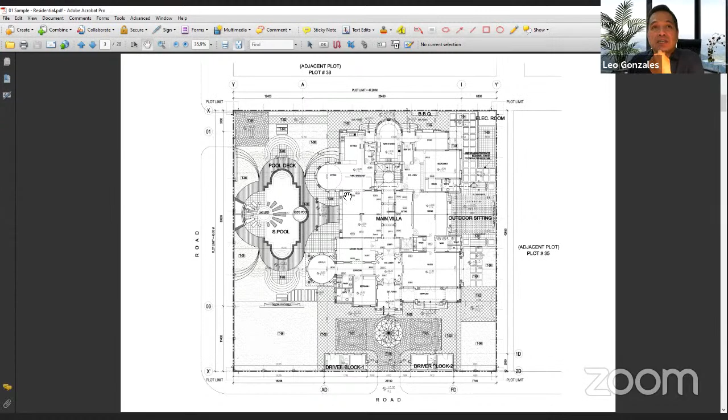So as you can see, the architects attempted to put in a bunch of lines and created these shapes and called it a swimming pool, and then they put a jacuzzi in there. This is the floor plan isolated, so you could have an idea on the size of the open space surrounding it.

Translating that into the definition of spaces, we came up with this very basic conceptual diagram. He wanted a grander entrance, so we've basically created a motor court with some nice paving and some patterns. Then he wanted a guest access, so we provided this linkage to the back and created a patio on the side here. They've originally provided an outdoor sitting, but we've looked at enhancing it further.

He asked for a swimming pool, which we've located on this side because this is the widest spot that we have on plan, and also it would help enhance the views coming from these rooms.

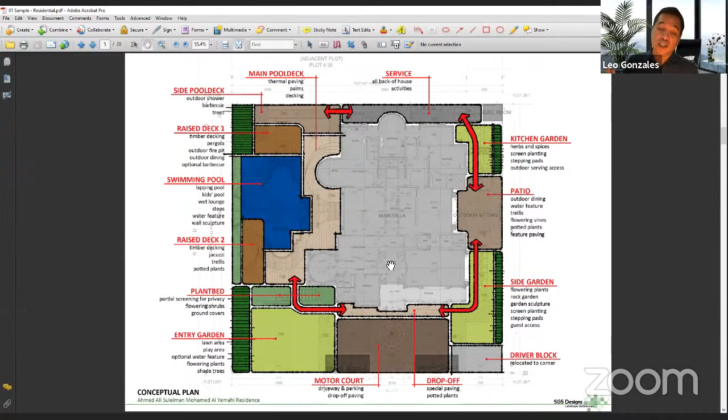This is a quick study on one style, wherein we've defined the paving spaces. We went with a very formal, regular style, using a lot of grids and dimension stone, so it looks a little traditional in terms of the textures we were creating and in terms of the shapes.

It's asymmetrical balance. Like we've got the square here, but it's not really symmetrical. But when you're viewing it from the living room, you see a symmetrical view of the water wall and these 4 trees. The same goes for this angle. The axis, when you're viewing the pool going that way, there is still balance even if the shapes are different, and vice versa.

This is a symmetrical space blending with an asymmetrical but balanced layout of the swimming pool. We try to do the same for all the other spaces around.

A second option was going with a different type of paving style that looks more sleek and more modern. We've introduced a bit of stepping, or irregular arrangement of dimension stone on pavers, to break it up a little and give it a more modern style and feel.

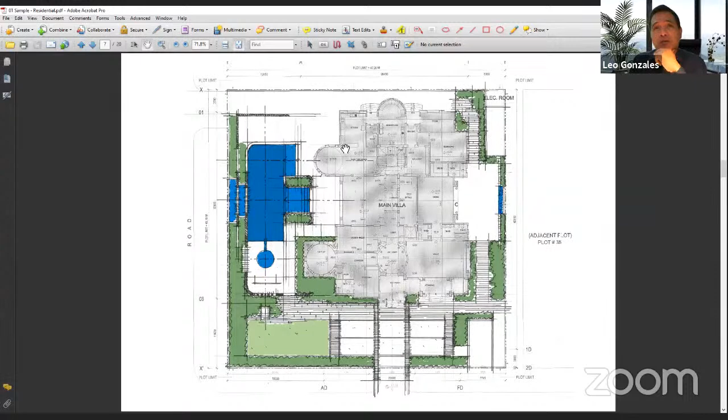Then we explored a third option. Looking at the style of the villa, it looks very formal, but then you've got these circular shapes around. So we thought we'd explore a third option based on curvilinears, and we just went for it, put the curvilinears all over. We thought we had the space to do sweeping curves. So we've come up with a totally different option, but still, if you look at the arrangement of spaces, they are the same.

We created a raised deck here, but it's made of lawn rather than paving. We've created the pergola here, but the intersection with the swimming pool we've maintained. We still have the waterfalls here, and we've still provided the jacuzzi. Instead of putting that in here, we've moved it to one side.

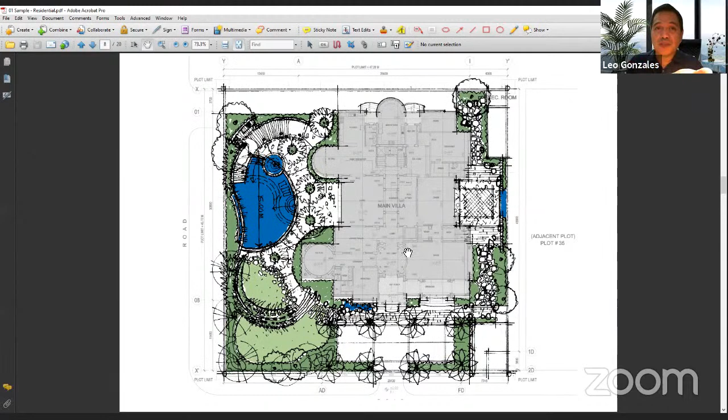We've also addressed the service access at the back. In all three options, we've addressed the service at the back and provided some walls for privacy. Here we've provided walls wrapping around three sides of the swimming pool. So with that, team curvilinear wins, and this is what the client approved.

This is the final version, the final rendering of that concept, wherein it's more refined.

You can see the similarities here. We've provided some optional shading above the carports, but we've designed this entire area as one paved space, and we've provided some patterns to enhance the design of this area.

We've continued with the curvilinear, and we've raised the pool deck I think 3 or 4 steps up, so that you've got grade separation, which adds to privacy. We've got walls wrapping around this way. We've still got the lawn space in there.

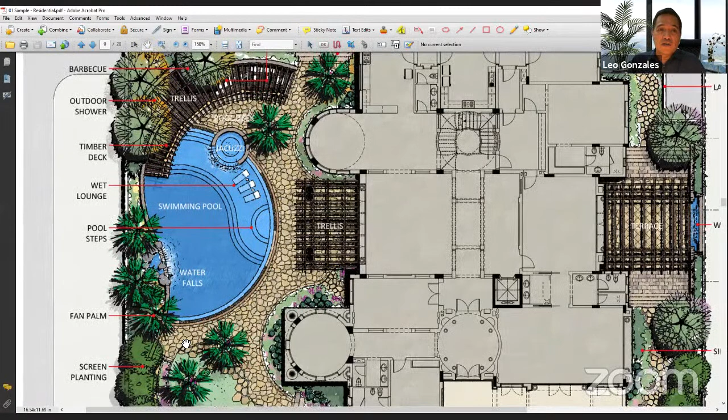We've created overhead planes here to help frame the view and provide a shaded spot. We've got the swimming pool, and we've played around with the layout of the walls. We've provided a more natural looking waterfall, and maintained the same theme for the pergolas.

We've tucked in the barbecue and an outdoor shower in an offset wall at the back, and maintained this screening against the service access. On the other side, we've maintained the side garden. We've got the terrace, which is the secondary entrance into the dining room, in the majlis.

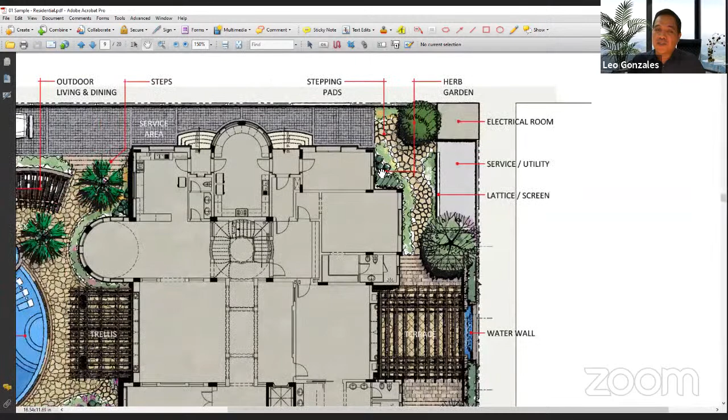We've added a water wall, and created another intimate space by introducing a pergola, so it goes up to this plane and then down again. We've addressed screening of these utilities and provided some lattice work, and this is still the herb garden. At the back here is the entire service area. So that's how that has been translated.

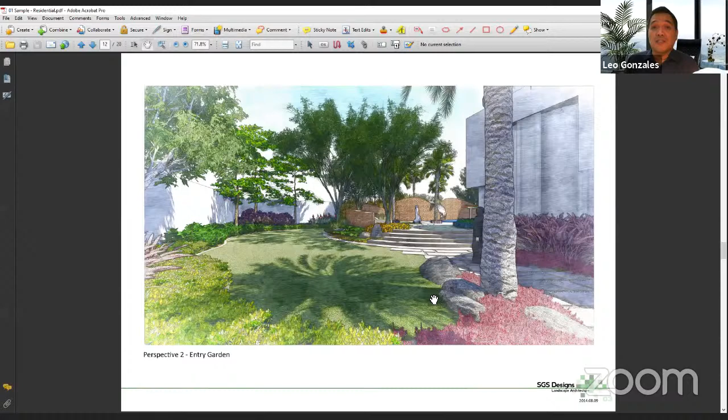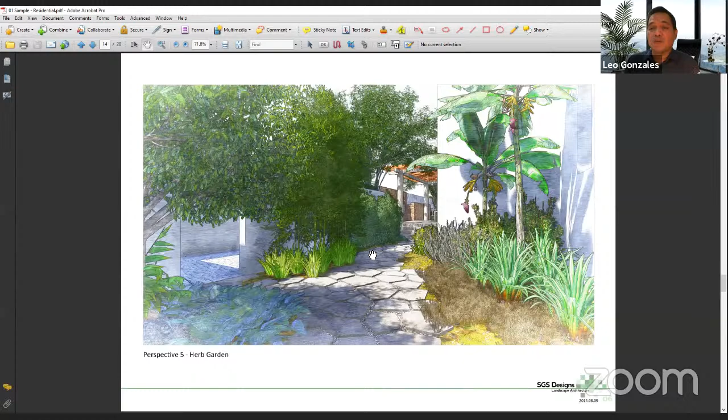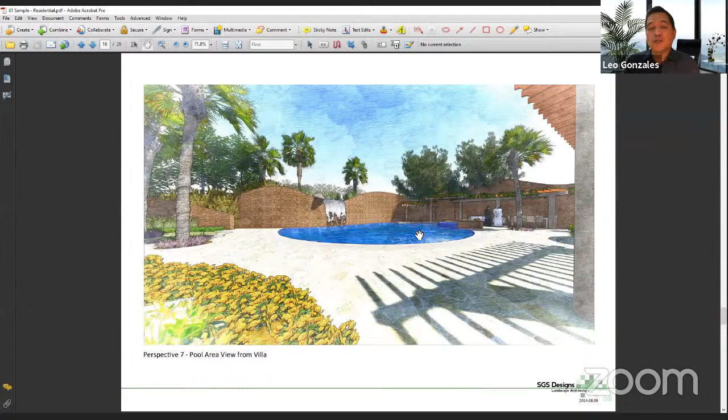This is the herb garden, which just tries to highlight and show to the client that we were actually providing planting against this wall we've created that covers the utility. This is the steps going up to the pool area. We've played around with the levels of the walls, so we've got curvilinears on the base plane and on the vertical plane.

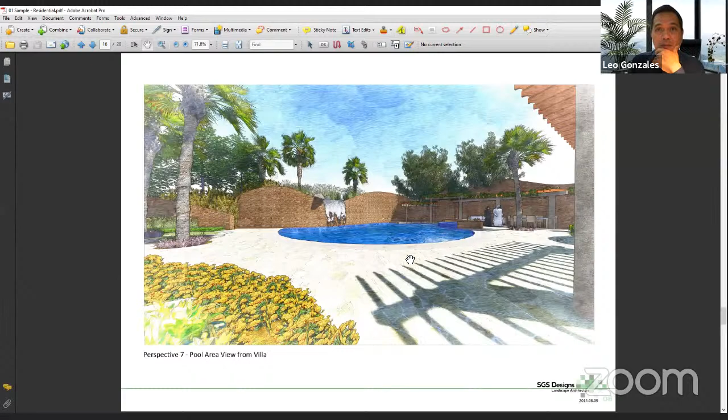We've provided a dip in the middle, and that's where the weir of the waterfall is. This is a view from the pergola - that part that extends into the swimming pool to create an effect like a floating pergola, with paving on the deck. This is the jacuzzi, which is raised and water falls down to the swimming pool.

And we've created the shallow space. In the absence of a kids pool, we've created a shallow space that also becomes like a wet lounge.

This is the service area and how we've treated the back, including the service access for the vehicles. And we've just compiled some reference images to establish character and a handful of plant materials that we proposed for the project.

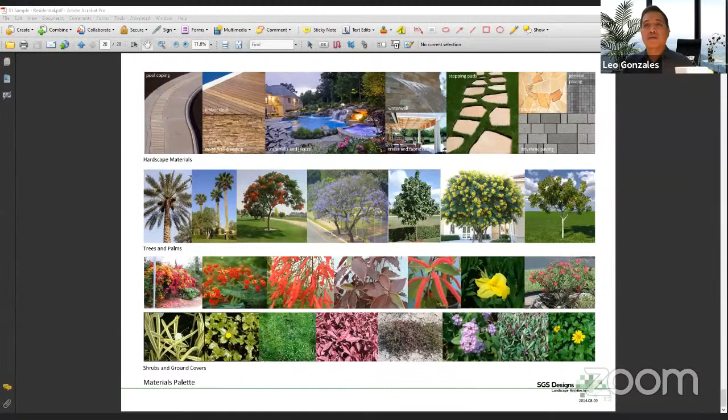Okay, so that's the residential project. The next sample... let me stop the share and move to another one.

Okay, so this is a boutique hotel, which has totally different requirements. This is a medium size, I would say - I can't remember the actual size, but it must be at least 4 hectares.

Well, I cannot disclose the identity of the hotel, but they are known for this. They create unique hotels that feature authentic local experiences, modern design, and intimate service.

This is from their website. They say each hotel is as individual as its surroundings, and is also a reflection of them. You can taste the local flavor, blah blah blah.

Essentially, what they create is - if they build a hotel in Manila, or a certain part of Manila - what they do with the design is try to feature the specific and unique culture of that neighborhood. So you won't have the same experience, and that hotel instantly belongs to that neighborhood.

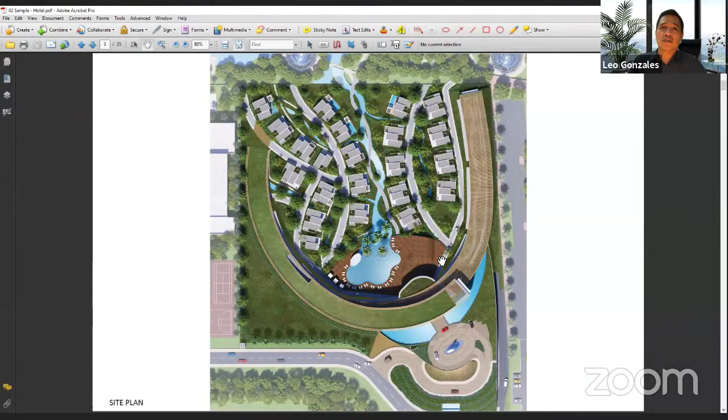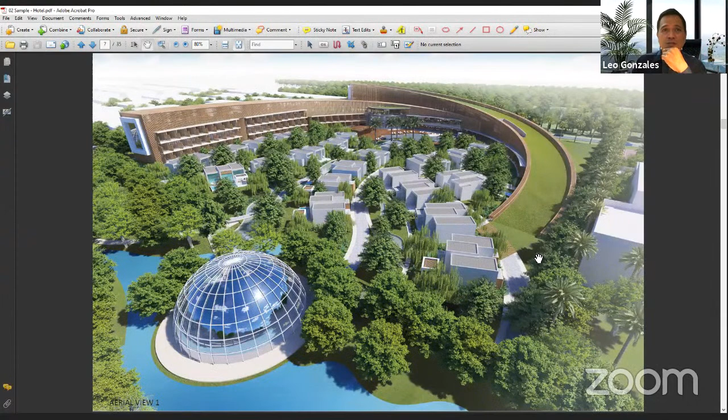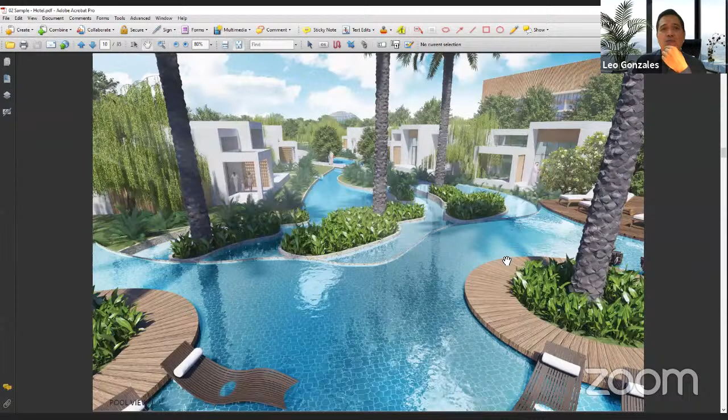These are just some money shots on the structure, from the other side, from the facade. And this is like in their proposed pool area. Another shot of the backside. And another. This is a shot of the inside.

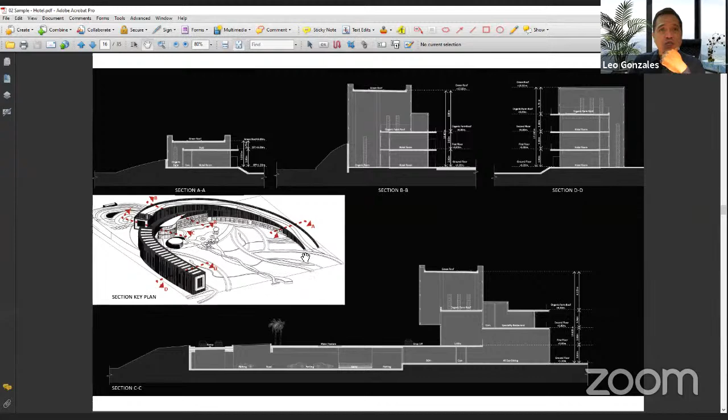So you can see here, this is that entire area that needs to be designed. This is the same plan, but I just wanted to reflect it here as a reference to the next slide.

What we try to establish when we're creating the spaces for them is we've established five major areas or elements within the hotel. So you've got the pool and health club, which sits right next to the hotel.

We've made use of some natural materials, boulders that are of local sources. We've capitalized on the levels, introducing level drops into the landscape to open up the views of the hotel downwards from all around, and to exaggerate the level change.

And it matches the overall concept of the hotel's architecture by playing off the slopes. We've introduced farming villas, which is not a new concept, but what we're trying to do is integrate them into a little bit of fishing, so it's a relatively new idea. The idea is to have two levels where you enter from the top and then go down and experience the water. We will show you some sections of these concepts.

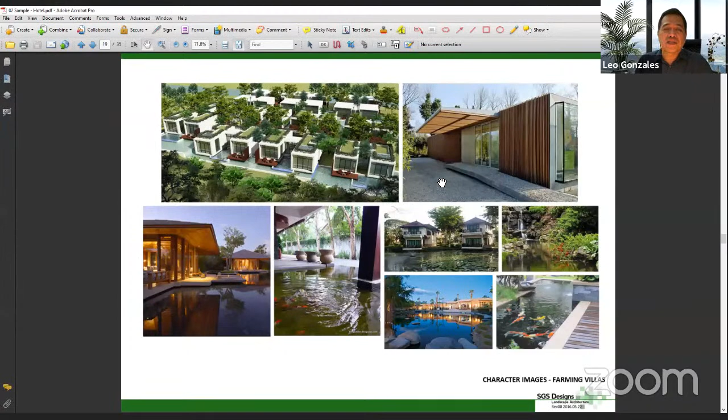Then we've got the farms. We wanted to integrate actual farms or show farms that would feature traditional types of farming. This is a traditional irrigation system called falaj, you can see that here and there, used in the Middle Eastern region. And then they also do greenhouses to maintain temperatures in their parks, in their farms. And then because we're playing with the terrain, we're proposing some terrace farms.

And then to complement that, we're also introducing orchards. We wanted to create this type of experience wherein the very limited types of trees that fruit in the Middle East or in the UAE are featured. So it's a totally different environment from the farms because of the canopy.

And then we've created a fishing lake in the middle of the space. The idea is to have a place to eat where you could go fishing, catch a fish, and have it cooked, just like what we have in Manila, but you don't have those in the UAE. So I wanted to bring in that experience and have a bit of aquaculture into the farming concept.

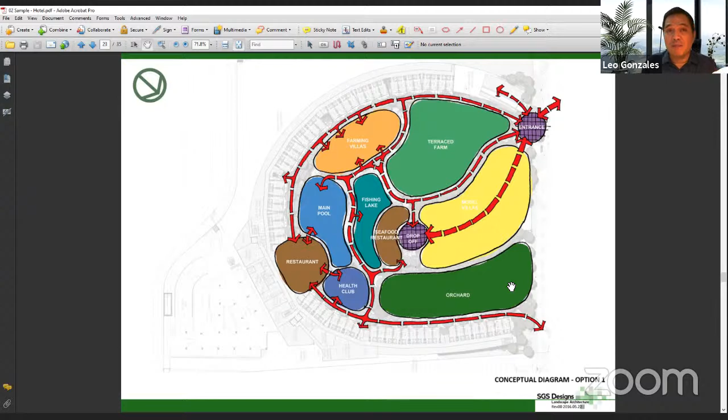A second option that we've created has the villas wrapped on this side, with basically the same arrangements, just different in sizes. But we favored this option because it capitalizes more on the grading strategy that we have in mind, which I will show you after this.

This is how those areas were translated as a design. So you've got the entrance in here, and then you have the access going into the model villas. And then you have a small drop off for the seafood restaurant, and then you've got the fishing lake in here.

Up here you've got the terrace farm, and the slope goes downwards that way. Then you've got the farming villas on this side. You've got the main pool area here, which features some private pools and cabanas, and a larger infinity pool below. We've created a small health club with a small lap pool and a mineral pool, all very close to the all-day dining and outdoor dining space wrapping around it. And then here we've got the orchard.

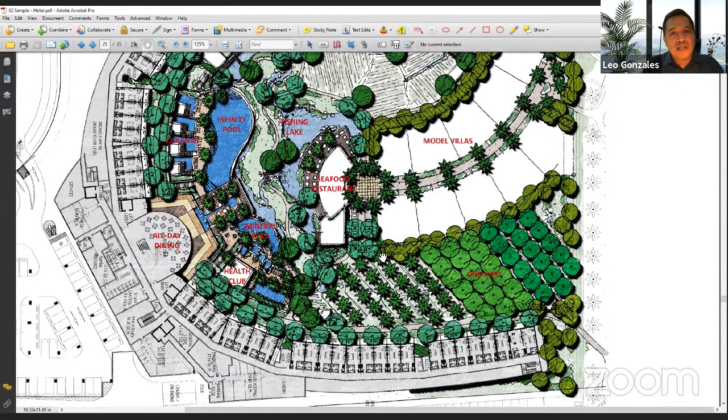In terms of grading, this is the general grading that we propose for the area. We're in, this is a high point. This is also a high point, generally around the same level. And then we wanted to create a depression at the middle and make that the fishing lake.

The idea is to collect as much water as possible, either with subsurface drainage or surface drainage, and then recycle the water and use it, have a little bit of aquaponics going on. Use the water of the fishing lake to irrigate some of the farm areas.

And we also wanted to capitalize on the view, so we wanted this entire area to be looking down to the landscape.

We've placed the villas in such a way too, because we wanted them to have like a terraced effect going down, so that when you're looking from the hotels, you don't see a big block or massive buildings. You see a terraced arrangement in a curve. And then with the trees, we thought that it would look a lot better than just a single row of villas.

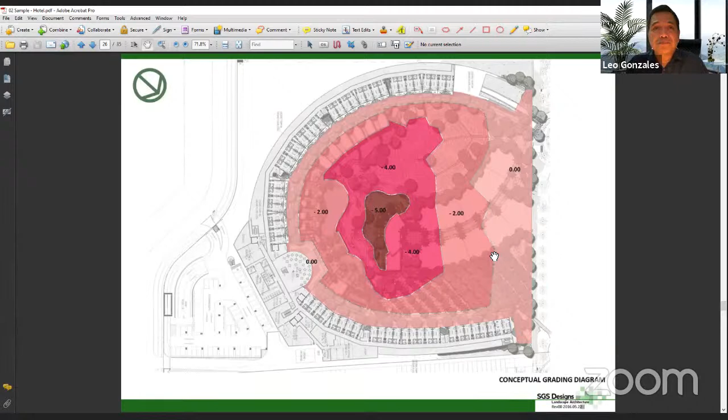This is through the health club, the same strategy. You've got the health club building, you've got jacuzzis, and then at the lower level, you've got your mineral pool.

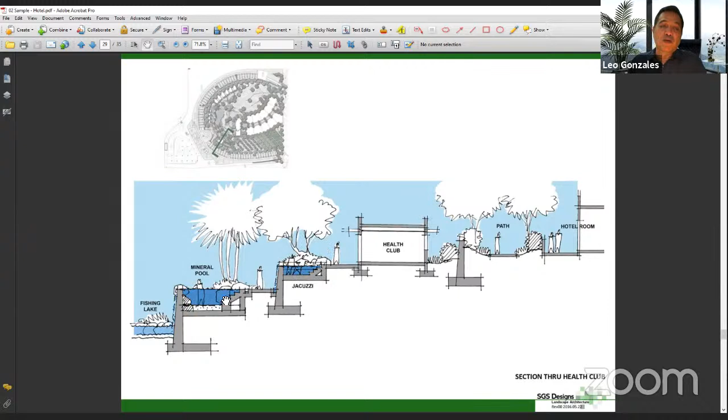These are just very, very quick sketches just to give you an idea on these areas. These are the cabanas, and then those are the water walls, and then this is the main pool.

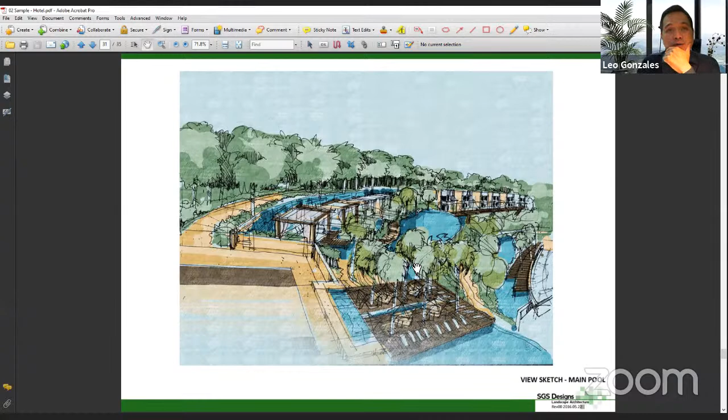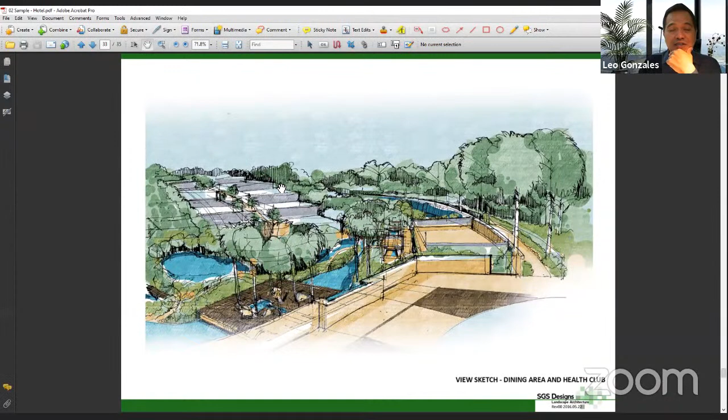This is just a view from the all-day dining area, just looking at the expanse of the landscape here. The orchard is over here, and these are the terraced villas that we were trying to create, and we wanted to illustrate.

This is just another view showing the swimming pools and the lake below it, and then part of the terraced villas.

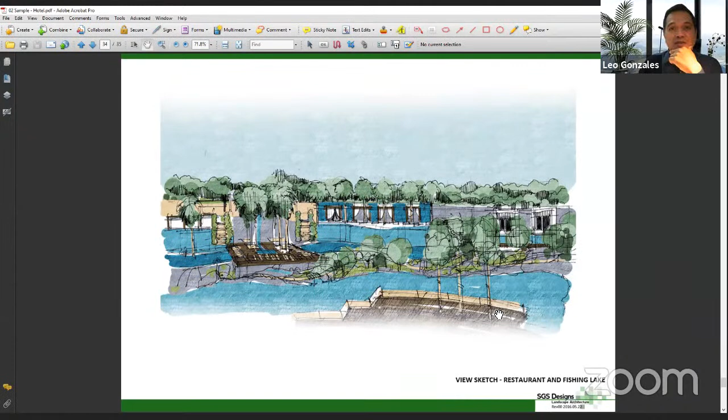Okay, so the last example, as I mentioned earlier, is quite comprehensive. It's very comprehensive in terms of discussing and defining the design vision and translating those into strategies, all of the considerations, and how all of that information and all of those concepts and strategies translate into actual zones in the project, and then ultimately defining spaces within those zones.

So yeah, I mean, in each project, especially the big projects, that is usually the process on how you arrive at creating and arranging your open spaces.

Okay, so case study number 3. This is a public park. This was SGSD's proposal for a massive beach park in Tanzania. And this is the landscape design brief that we prepared.

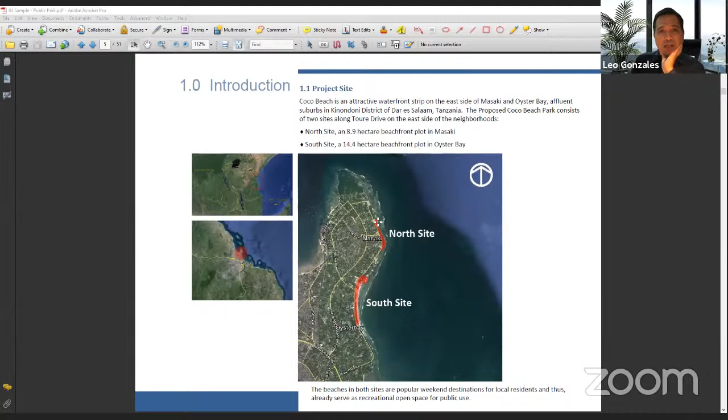This entire area is actually a beach frontage. Let me zoom in. This is an entire beach frontage, this side, facing the east. And this is primarily cliffside. And then there's a beach below here.

There's a gap here because this space has already been acquired by a few hotels. So we had to establish a connection through the streetscape.

I'll go quick on the project background. This is just project understanding and the scope of work, and then we go to the design strategy.

So we're looking at park amenities programming, retail amenities, vehicular circulation in the park, foot traffic, maintenance and emergency, the aesthetics, the design of landscape elements, hardscape and softscape strategies, lighting.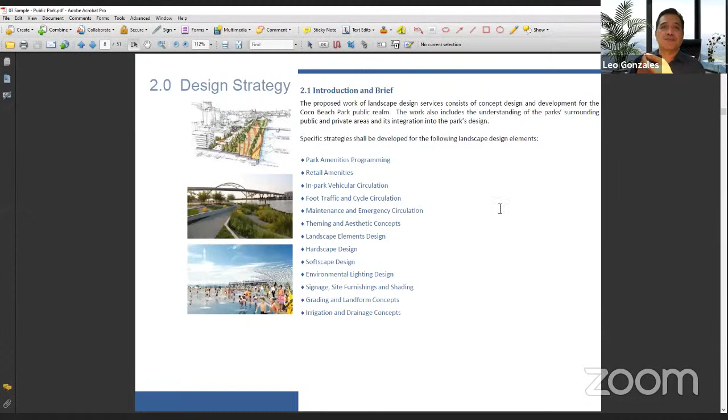So we start with an overall plan, an overall vision for the project. We wanted to design a public beachfront park which accommodates the wider district through the provision of a range of activities, active and passive recreational opportunities, facilities, and environmental improvements. So we've broken down that overall vision into some objectives.

So we wanted to create a high quality scheme, a sustainable environment, access for all users and linkage to the surrounding transport systems when they come in. Create active and passive recreational areas, and opportunities for varying programs of activity, meaning spaces that are multi-use. Provide car parking.

Provide a commercial component by introducing food and beverage units to the beach and the park. Addressing the nature of the surrounding areas, meaning if there are residential neighborhoods, we are trying to be sensitive about our park activities next to it. Also, same goes for the hotels nearby. And then primarily acknowledging the needs of local residents because they are the target users.

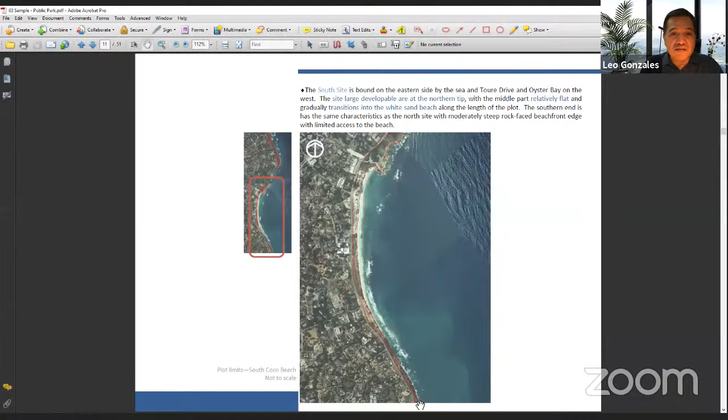So this is just a description of the neighborhood surrounding it, predominantly residential and institutional in nature.

Opportunities and constraints for the project. Key opportunities: the place already has established users. There is actually an existing bar and restaurant called Coco Beach Bar. The quality of the beach is very nice, relatively flat and varying width of property, so suitable for various types of activities and spaces.

There's existing mature vegetation that can be integrated, and it's a quiet, low-density neighborhood in the surrounding areas. Constraints: you've got access, circulation, and parking provisions because there's none present at the moment, so that needs to be addressed.

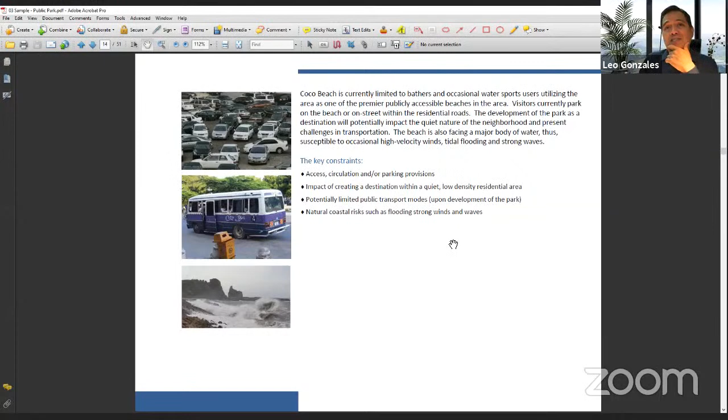There's the impact of creating a destination within a quiet, low-density residential area, which we would try to mitigate by being careful with our placement of amenities in certain areas. And then, of course, there's the natural coastal risks associated with a beachfront.

Okay, so this is what we established as an overall design concept: to form distinctive character areas of active and passive use, providing for a choice of interaction and isolation while providing continuity through design and access.

So now it's from a very broad vision. We are starting to narrow down the types of spaces that we wanted to create. We're saying here active and passive spaces as a primary typology of spaces that we are trying to create, so that you will have varied experiences, and then all of them are interconnected.

Okay, here we're saying too that we want to put in commercial activities into it, and we wanted to create some additional nodes that become gateways to the park.

The commercial component is going to be primarily food and beverage that are going to be situated in specific areas, but also at a smaller scale distributed along the length of the park. Simply because it's a linear park, you need to distribute these types of units along that length. And we also wanted the park to be very porous, no barriers, everybody could go in.

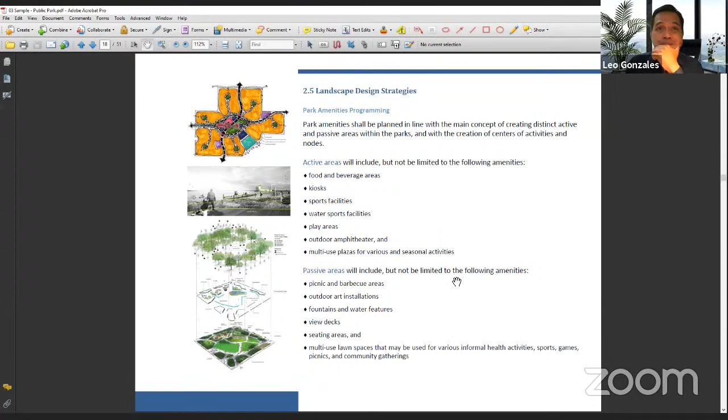And then we've expounded more on how we want to define our commercial component by looking at our retail strategies. So this further defines the types of elements and spaces that we are trying to create in these areas.

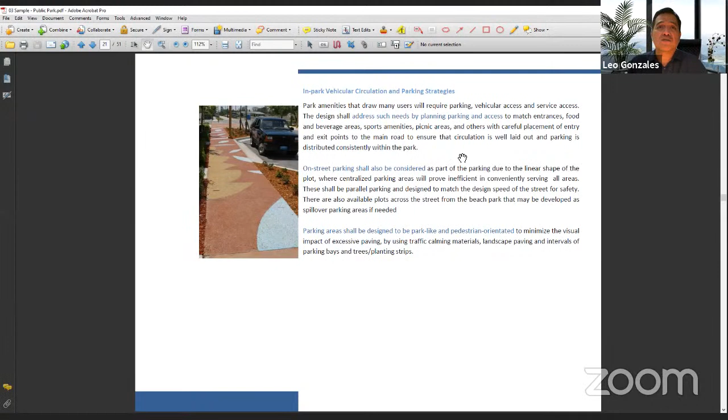In-park vehicular circulation—just discussing the connectivities that need to be taken into account, like parking areas, roadside parking, etc. Foot traffic and cycle circulation: we're basically creating a major promenade that connects everything, and then you have secondary paths on the side of the road as part of the streetscape.

That is where we were proposing to have a bike lane for cycle traffic. And then, because the main promenade is wider, we're sizing it so that it would account for and could be used for maintenance and emergencies. So you're paying for one.

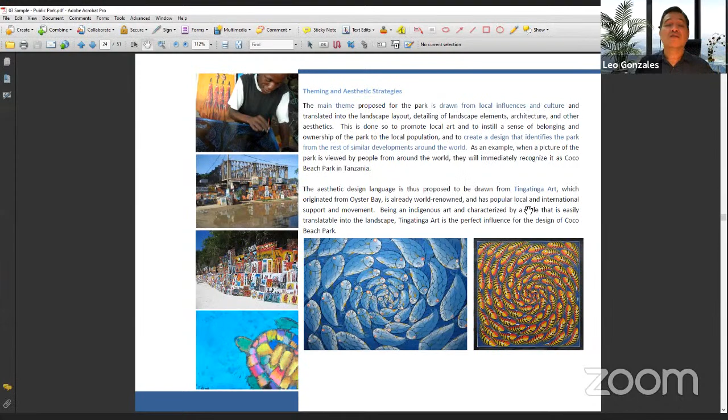Okay, just aesthetics. The aesthetics is, I guess, beyond the identification of space planning, but it's in the report, and I would mention that we've drawn the influence on the aesthetics from a local art, a local type of painting which originated from the same neighborhood. So it was an obvious choice to pick up and interpret as part of the design elements in the landscape.

So we're trying to interpret these paintings, these works of art, in terms of paving, in terms of planting, furniture, and as murals, as walls, as works of art—highly influenced, very colorful, lots of patterns, vivid colors.

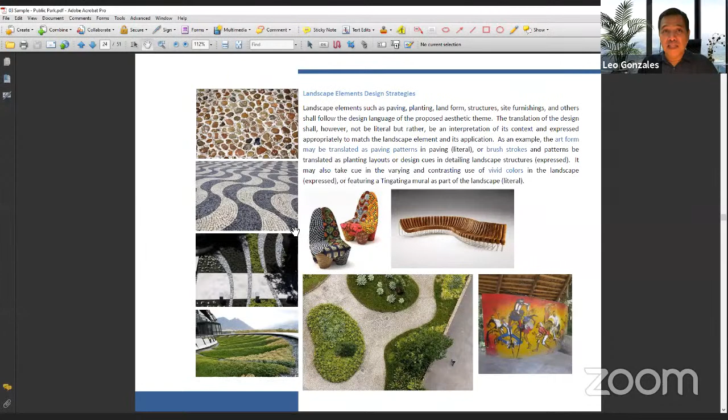And then we're just discussing our hardscape and softscape strategies. These tie in to basically some maintenance and quality level that we want to have, because this is a public park. And then we're tying into this concept that the hardscape and softscape in terms of patterning are going to be complementing the design of the other landscape elements within the park.

Environmental lighting—we're going to create effects, we're going to create illumination so that the park is usable in the evenings. We think the commercial component of the park would be very successful in the evening time as well, so it made sense to have, if not the full entirety of the park, partial areas within the park lit.

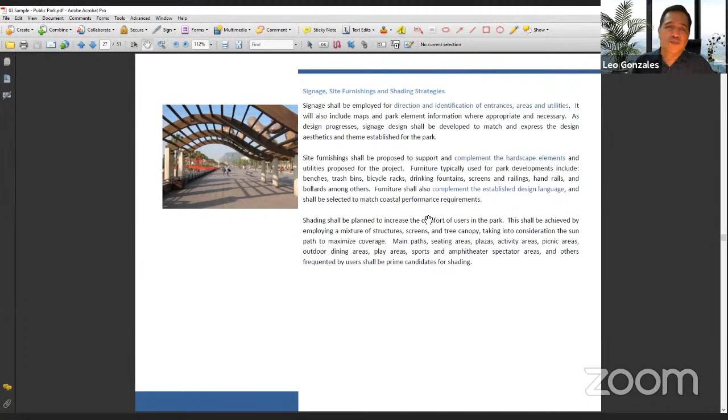Signage, site furnishings, and shading strategies would all go with the overall approach in aesthetics and functionality as discussed previously, along with the hardscape, softscape, and landscape elements.

Grading and landform. In terms of grading, we are respecting and trying to maintain as much as possible the landform or the levels in there. We've identified a couple of areas that are natural drainage channels, so we've proposed a design that respects that and doesn't touch it, just enhancing the landscape around that area.

We're using landform to create interest in some parts of the park. Irrigation and drainage strategies, the same thing—matching local standards, with alternative stormwater drainage strategies that go with landform and grading strategies, collecting and diverting and bringing stormwater back into the ground.

And then there's the existing natural conditions. We're basically saying here that we are respecting it, preserving it, and trying to integrate it into our design. You will see how that gets translated later.

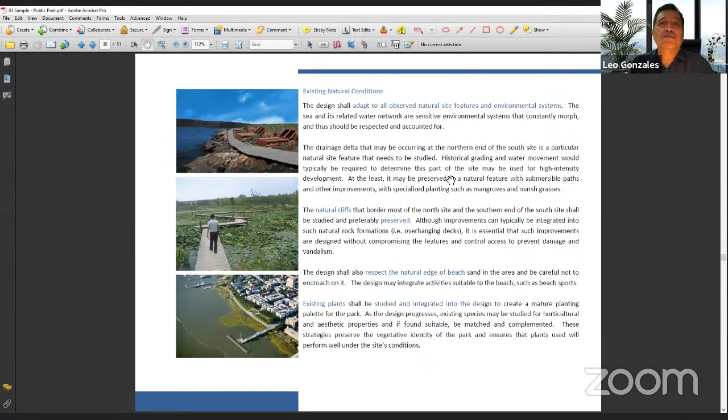Streetscapes—being a linear park next to a road, the streetscape is a major component in this design. We're slowing down traffic, improving safety, introducing roadside parking, but we're also creating a good buffer of planting to separate the park from the streets.

Okay, so concept design. First, the site planning. You've got your park centers, which are your retail areas. You've got your active areas, as discussed earlier, where you've got water play, playgrounds, sports facilities, etc.

You've got your passive areas, which are low intensity areas—picnic areas, multi-use open spaces, etc. We've identified the utility areas because we thought it was a critical area to consider and locate as part of our bubble diagram.

We've also identified parking areas. We wanted to illustrate how we are associating the parking areas with our park centers. We've identified nodes, which would have the entry points, the intersections, and the minor commercial areas distributed along the length of the park.

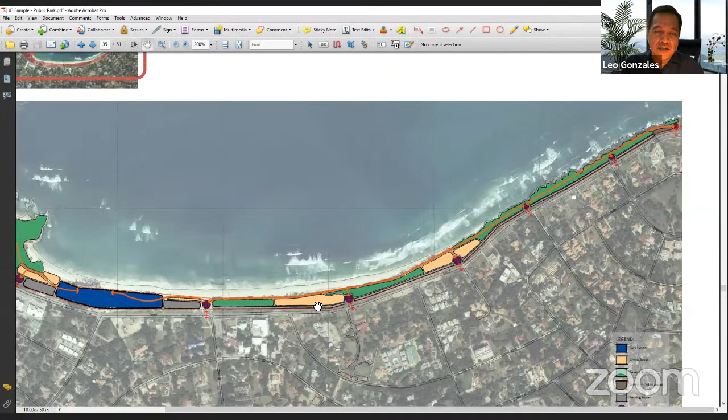You see that they are very close to the intersections, and that's how we've defined these locations—intervaling active and passive areas all the way to the end.

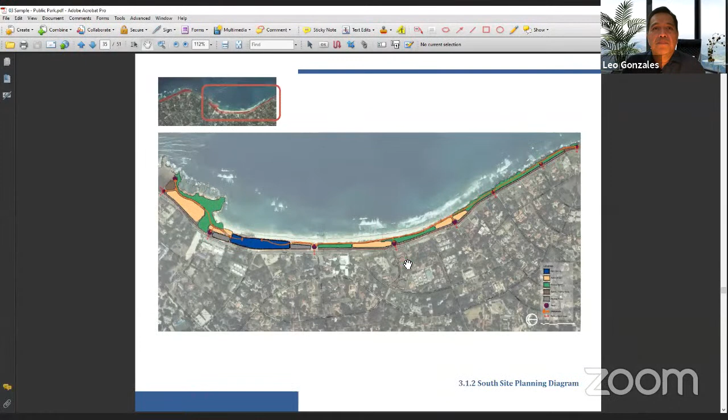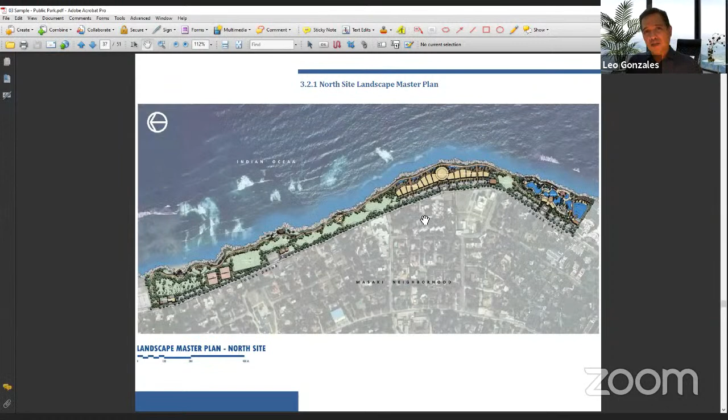And then we've translated that into a concept layout for each site. This is the landscape master plan for the north site. Let me shift to the next slide because it's more detailed so we can zoom in. Okay, so this north site, we've established the commercial component in here.

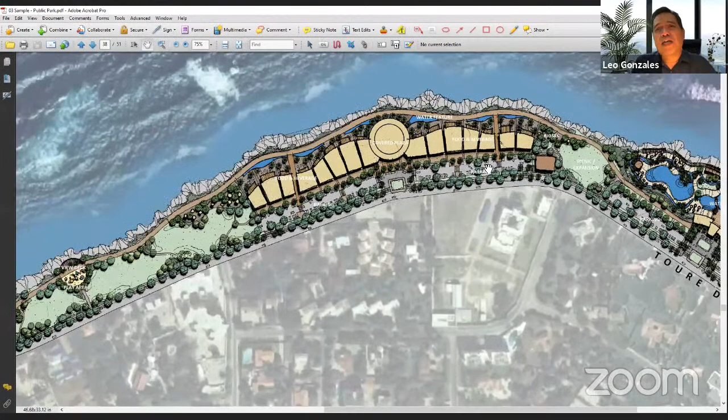We've decided to divide it into two and created a water park on one end, which would complement the hotels. It's isolated on one side with its own parking. This layout inside the water park is purely illustrative because you need a specialist designer for that.

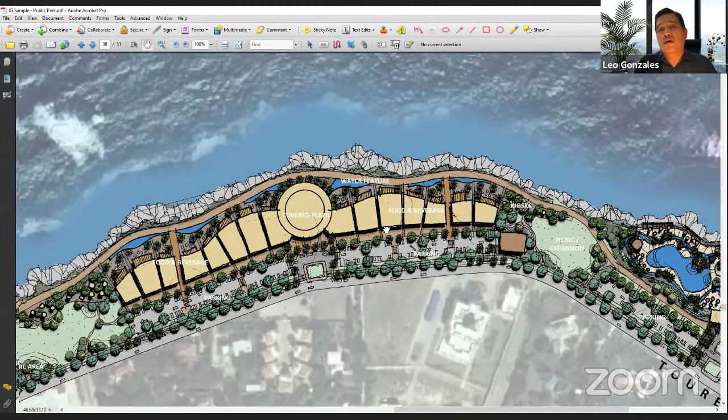We've attempted to create a layout that makes sense. And then here we've established our major commercial component, which is, well, a building. You've got a covered plaza, and smaller retail structures for food and beverage. There's no stopping the owner from putting some other shops in there, or even small cinemas.

But the idea is to have food and beverage—this entire area could be designed as a small community mall. And then we've got a water feature on that side, which we thought would compensate for the lack of access to the water. And then we've got all of these open spaces in between the edge.

The promenade is over here, along with the dining spaces, so you've created some varying widths and provided some canopy over it—built canopy with pergolas extending, and tree canopy from the palms. And then you've got the central area that's covered, which is essentially open.

Very similar to that elliptical open space that Mall of Asia has, and that's where the drop off is.

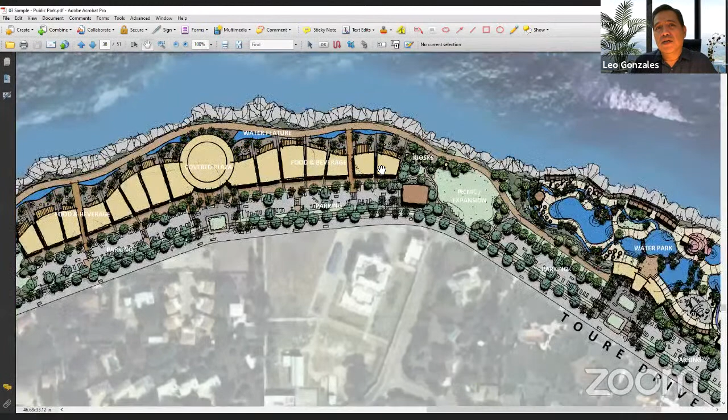And then you've got parking on both sides. You've got the admin building at this corner right here. We've allocated a little bit of open space here so that if ever this needs to extend, they can use that space.

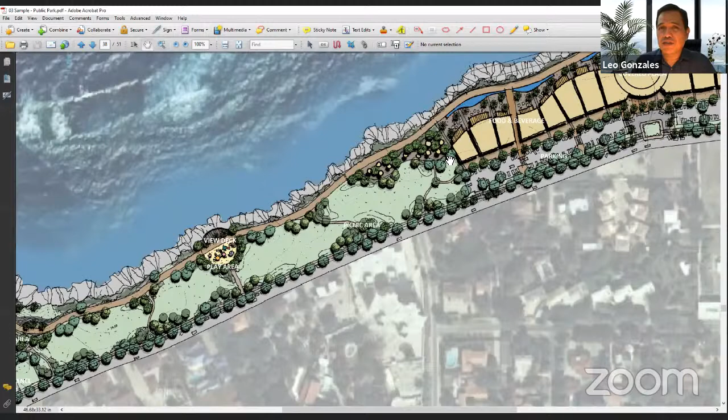The commercial component, if you remember, this is meant to be an interval of active and passive uses. So we've extended an outdoor space in here that are kiosks. So basically a paved space, very, very flexible. You can have as many kiosks or food trucks in there.

And then very close to just open spaces, multi-use, that can be used primarily as picnic areas. And then in between these two picnic areas, we've provided like a view deck, like a node with a play area.

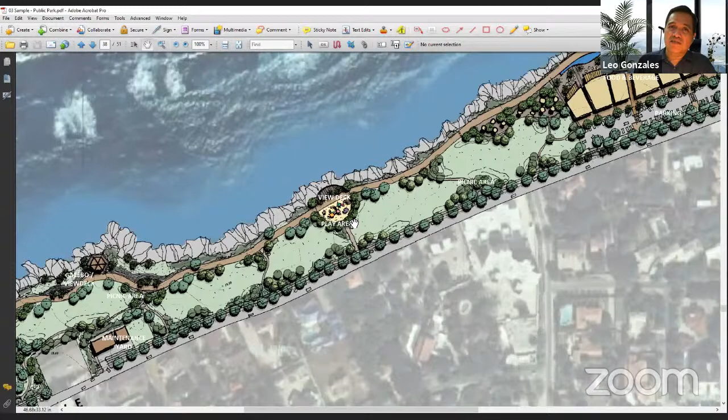And then it transitions into a more active zone. Onto this part, we've got a lawn space, but it's sized as a football pitch. So when not in use, you don't have the lines. You just bring in a movable goal and you can play football.

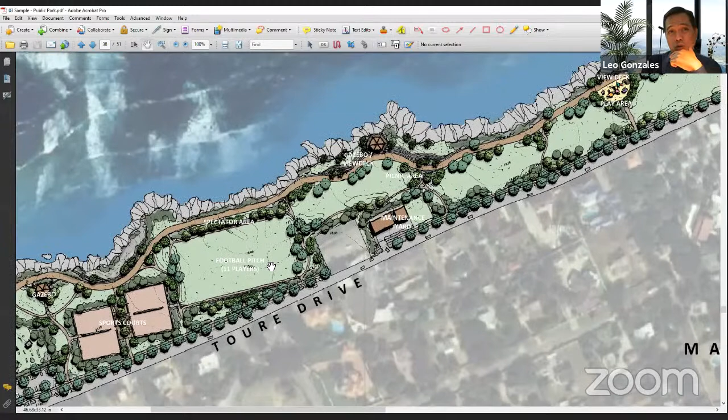We've included bleachers that look like park seats on both sides of it. And then we clustered them with a couple more sports courts. This could be tennis or basketball.

We've just made use of the high points in here and created these viewing platforms. So the walk itself is already a very nice view with some steps going down, as you can see here.

And then this is that spot that has a little bit of beach. So we provided a little node there, and you can step down into the beach.

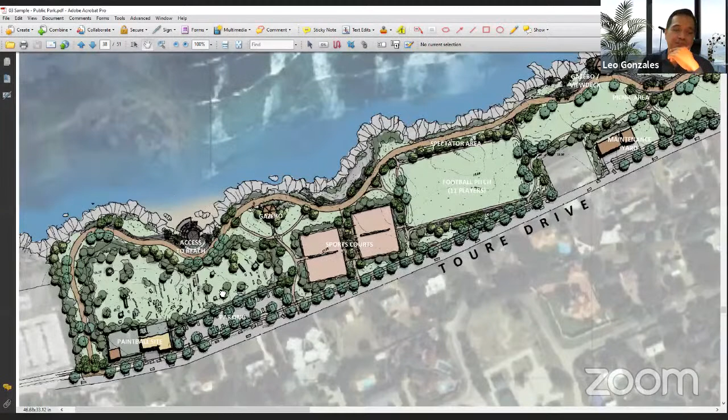This we proposed as a paintball site. Again, something that we thought could be an activity that associates with the nearby improvements, and also can be grouped into one larger active zone. So this is primarily active zone.

This is passive mainly, a little bit of active in here, and then your commercial component, and then another commercial component. So that's how we've translated this site.

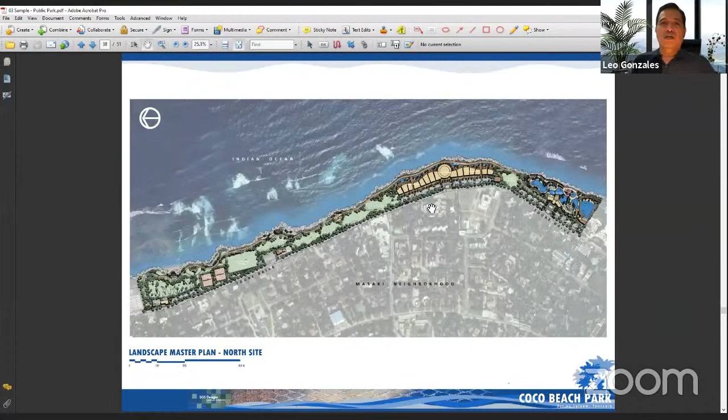Now moving on to the south side landscape master plan.

There's been some modifications on our design, the final design for this area, mainly in the commercial component.

So we initially thought that it would make sense to have the commercial component centered and wrapping around this. This is the existing Coco Beach bar in this area. We thought that we'd isolate it, and we didn't want to use the space because it's got the beach. So it didn't make a lot of difference to create a major commercial component in there.

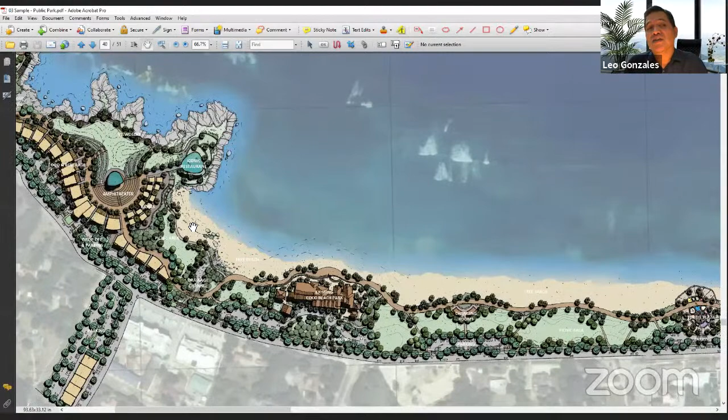Furthermore, upon further investigation of this area, we initially thought our information was that the drainage channel was actually coming from this area and crossing this area, but then found out that there are actually two, one here and one there. So those two zones we've retained.

And then this big chunk of land next to these dramatic cliffside, we've played with the elevations in here. There's a natural terrain going downwards there, so we've made use of that as part of the amphitheater.

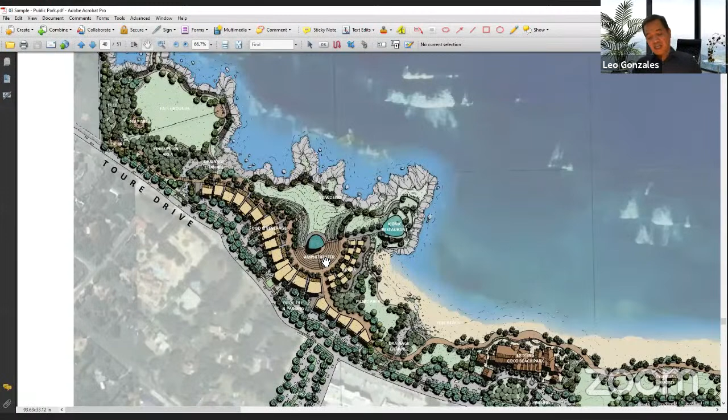Remember in the bullet points that I showed you about defining and creating open spaces, we said that the placement of these areas would respect or would consider the natural terrain, the natural features. This is one way on how we've elected to do that.

We've used this natural feature and created an iconic restaurant in this area. This is not a new idea, but we don't really have a lot of this in Tanzania. So in the context of the city, this is a new idea.

The concept of an amphitheater with a top level full of restaurants with folks watching and looking downwards. That is something new in this area and in many parts of the world. So we have made use of this area.

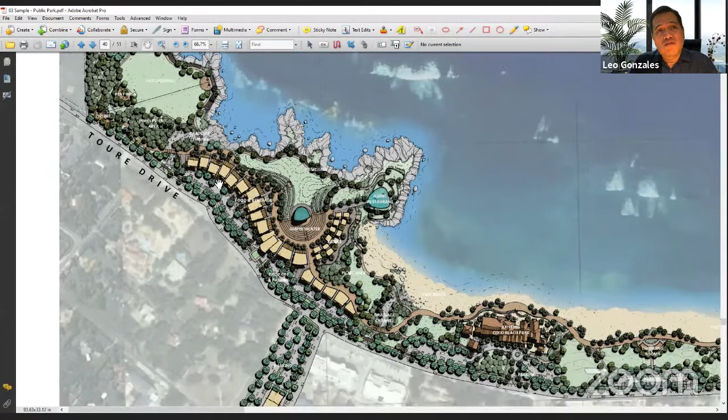We've provided the parking as part of the commercial component. We have included this area as part of a spillover parking that would support if in case there's a huge event in this space.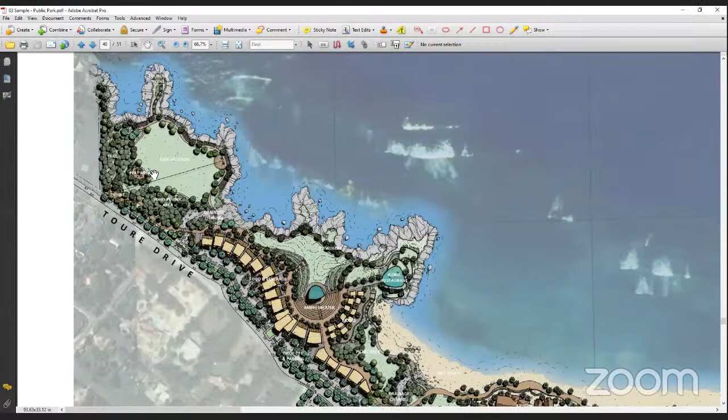This corner, we've identified this as an active zone. So this is designed more like an adventure park, wherein you've got a zip line, you've got fairgrounds in there, so you've got trails and you've got play areas. You've got a forest play area, and you could put in a number of other activities in there.

You've got a lookout point in this spot.

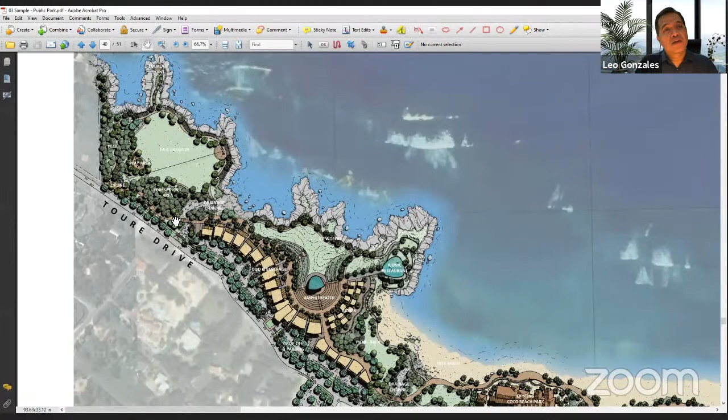And then we've got the main promenade running here, connecting into the commercial component down here, and then continuing down there. In front of the existing bar, what we've done is enhanced it by providing an outdoor dining space that's separated from the main promenade, and we provided proper parking for it.

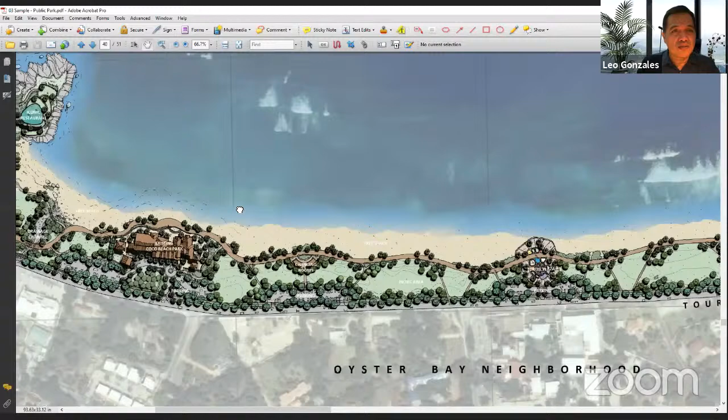We've created a major node in here, and I will get to that later. This side of the beach park has got changing rooms here as well, and also parking. And this parking is shared with the water sports area, which we've located here.

It's another active zone. Now, just going into this bit, we've created the space called Turtle Plaza, which has got a commercial component around it and a small water play in the middle, that's free to use. So it is a unique landscape element. Water play in itself is not unique, but in this type of arrangement, in a beach setting we're in,

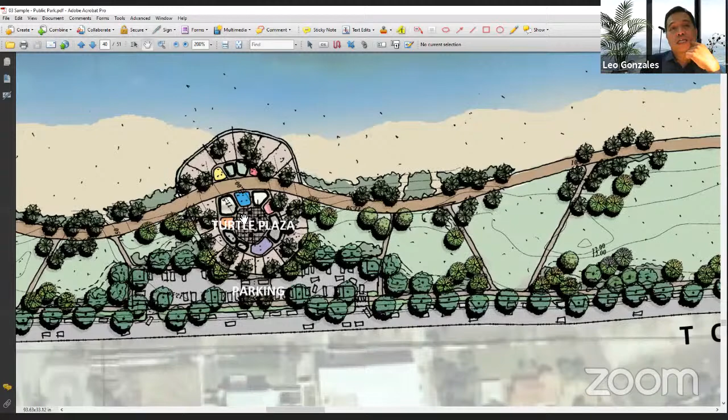there could be small kiosks and food outlets in here, or shops. Moms could be out here, or parents could be out here eating while the kids are playing. It's that sort of arrangement.

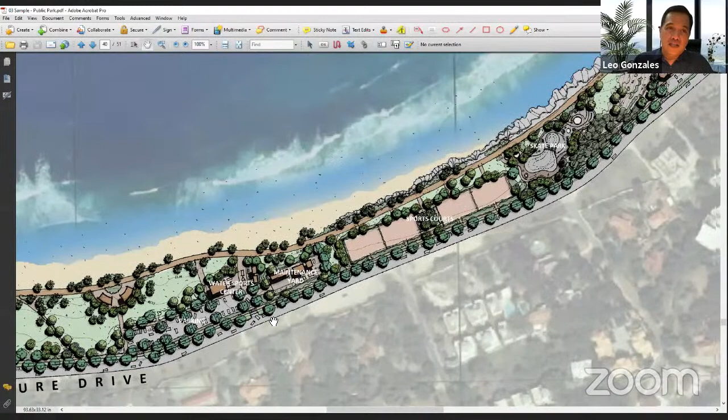Okay, so, I think my time is running out, but I'm about to finish. This is the water sports area. It's got its own maintenance yard and the center with parking. This is a continuation of that active zone wherein we've got more sports courts and a skate park.

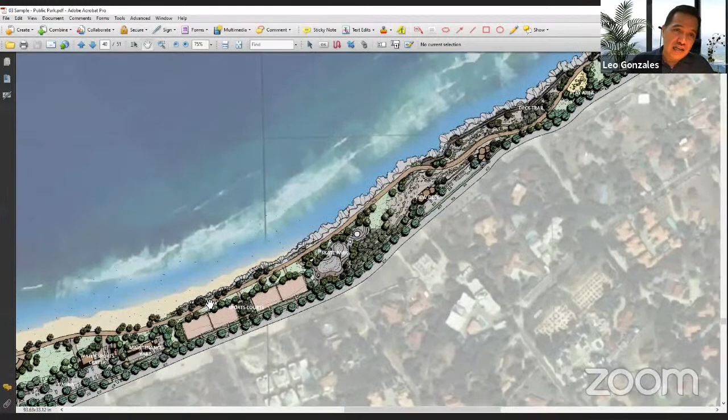And then this is where the beach ends and the cliffside begins to increase again, and this level goes up higher. So what we've done is we've made use of the natural stones and natural terrain. We've created view decks on the side of the road. We've created this promenade that goes under it and up, and the detour made of the deck trail that is sitting on top of the cliffside.

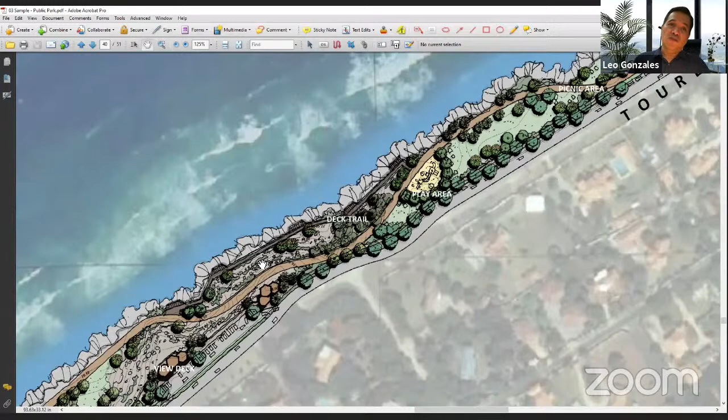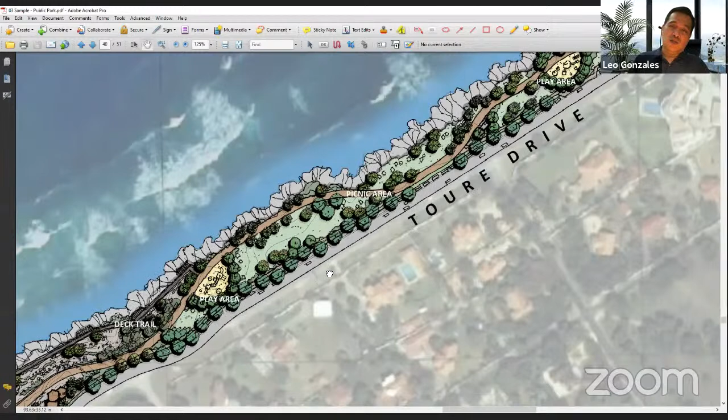We've retained and enhanced the natural boulders in that area. We've created a small play area in here and a small picnic area into this, just to provide some additional flexible open space in this area. Another one in here. And then there's an existing lighthouse in this area.

I forgot to mention that in the conceptual layout. And what we've done is we've introduced another commercial component that's very unique: a lighthouse restaurant. So it's making use of an existing lighthouse that is still operational, and we try to enhance it, provided parking for it, and made that a terminus, or an anchor activity area, a beginning and an end to this linear space.

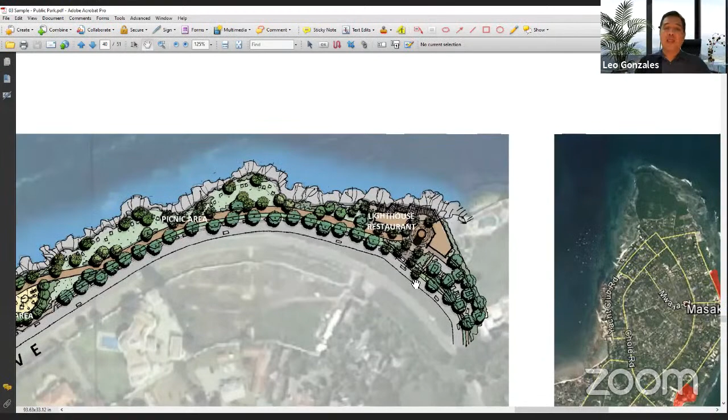Okay, so that's how that got translated.

We don't have a lot of time, so I will not say much about this, but we've basically identified the types of plots that we wanted to create: for parks, for retail, because those are income generating, and then parking, and then service plots, and then right-of-way improvements, which is basically improvements to the addition of parking, parallel parking on the existing road.

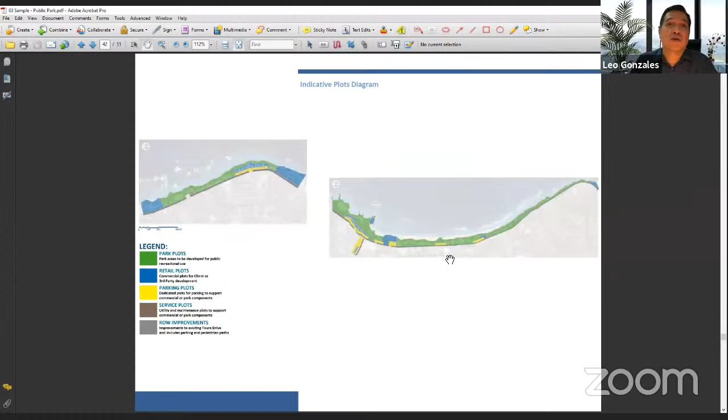With that, we've come up with phasing so that we know which one to build first, because it's impossible to build the entire park all at once, not with the funding available to government, and just because of the sheer size of the park. So this is the phasing strategy, and we've color coded the phasing in here quickly.

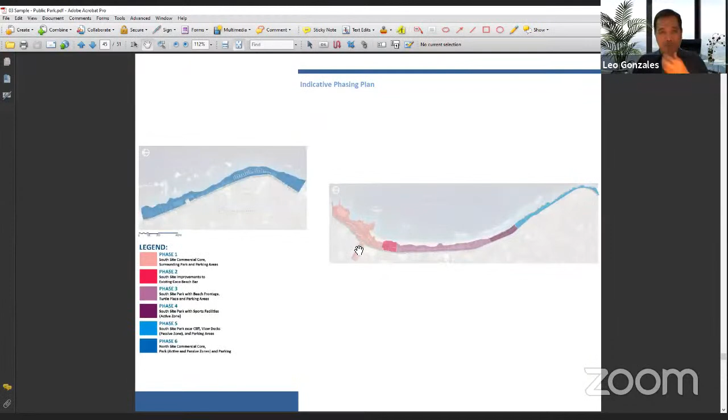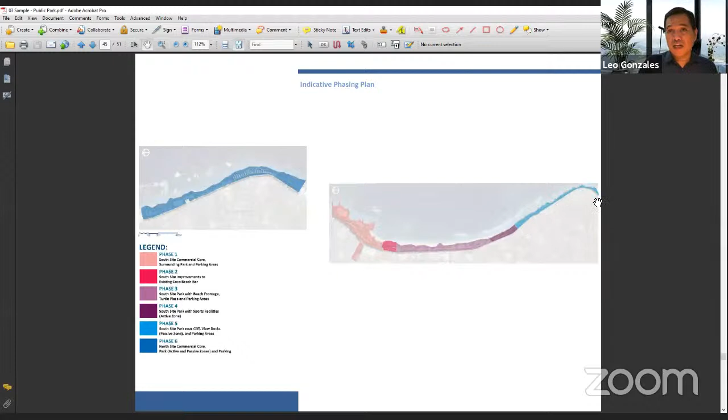This is the commercial component that goes in first. The Coco Beach bar area is second. This entire beach park is going to be third. Then phase 4 here, which is the other active zone. Phase 5 is this linear open space area, including the restaurant. And then we've elected to do the entire north side as part of phase 6.

Okay, so this is just moving forward. That essentially is how we've translated, how we've defined, how we've created, how we've arranged different types of open spaces, different types of amenities within our landscape into 3 different types of projects, different scale, different approaches, and different levels of difficulty and complication.

I have that's the end of my discussion.